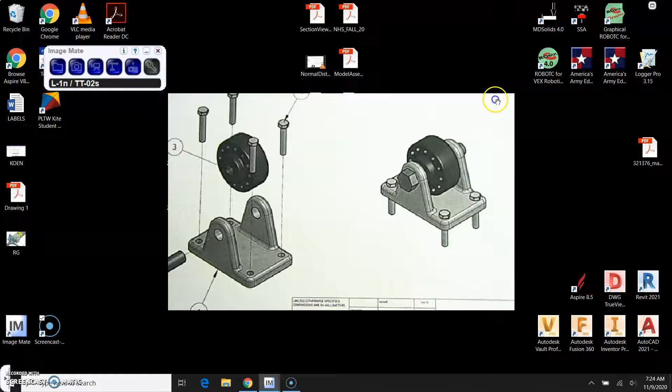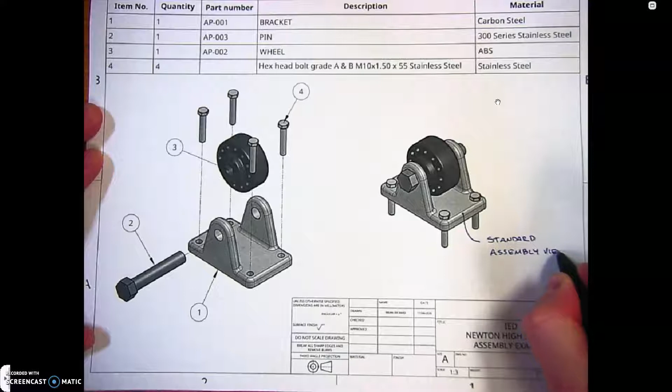Okay, we're going to look at an assembly drawing here, and so we'll take a look at some of the different features and kind of how an assembly drawing works. So right here, first of all, we have what's called a standard assembly view. The standard assembly basically just shows the parts as they would be assembled together.

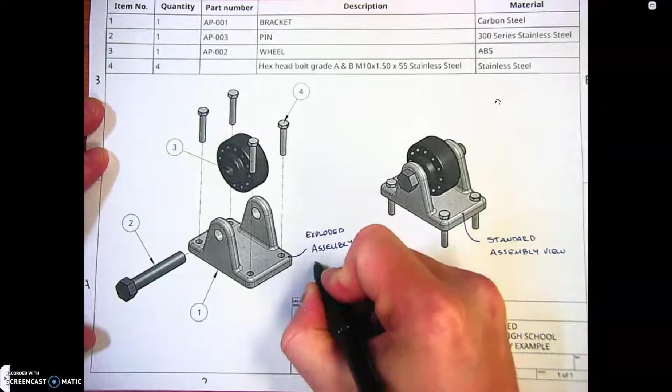Over here we have what's called an exploded assembly view. So the difference between the standard and an exploded assembly view is obviously in the exploded view, the parts are not together, all right? And so the exploded view shows how the parts would go together and gives the person reading the print a clear understanding of that.

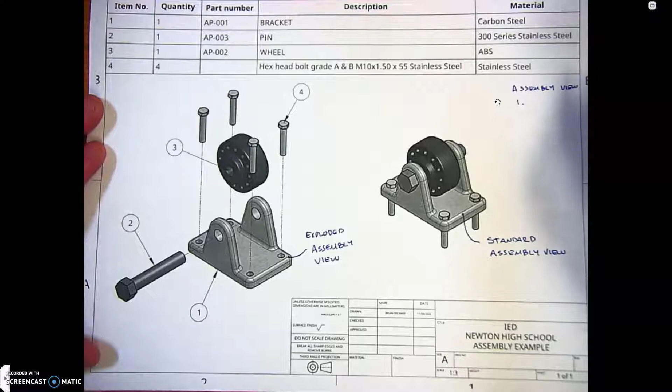A couple of things to point out with both of these views. You can have assembly views be front, right, left, just like you would a traditional multi-view drawing. But the case with these assembly views, if they're isometric, they need to be shaded. So most of the simple assembly views that we're going to be looking at here are these small assemblies with not a ton of parts. Those assemblies are going to need to be shaded.

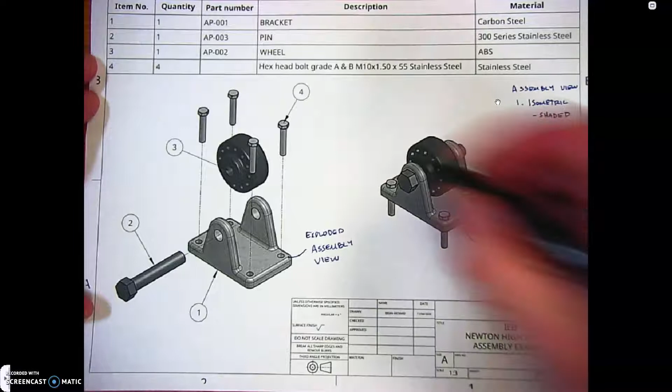These lines right here that are located in the exploded assembly view are called explode lines. Explode lines help you show how the parts are going to go together. And so we should always show them when it helps with understanding.

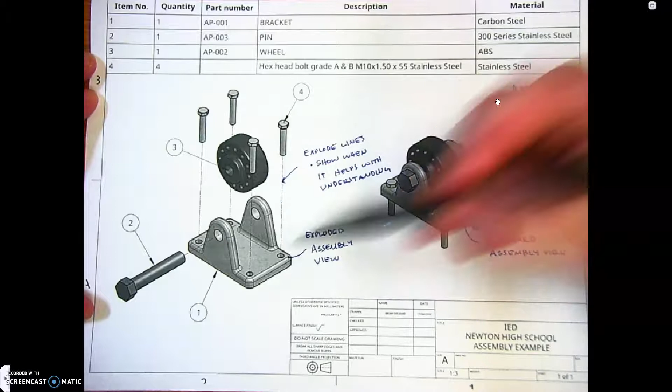So what I mean by that, when it helps with understanding, if you can see that this line goes directly into that hole, it's very clear that this bolt goes into that hole. And so if it's helping you clarify where the parts are supposed to go, you should always show an explode line. This table up here is called a bill of materials. And so I'll just make a line. This is a bill of materials.

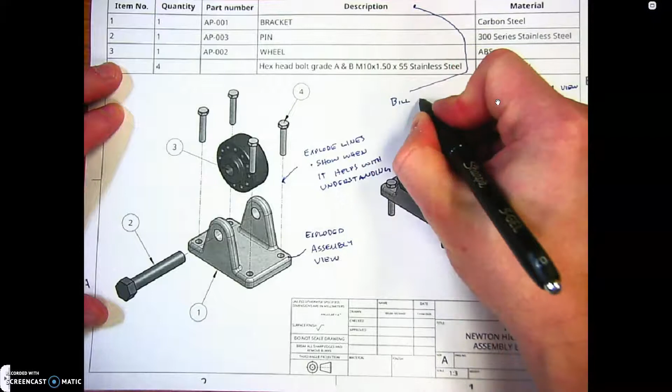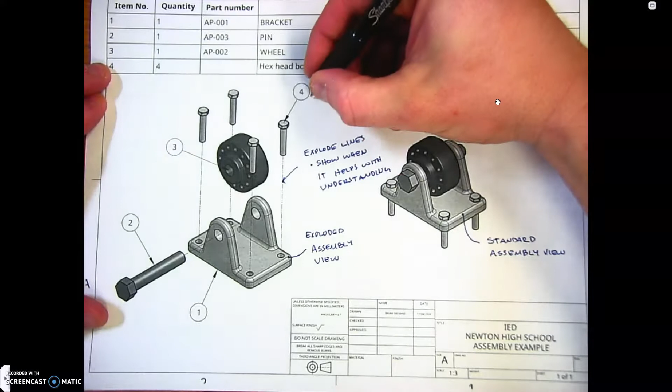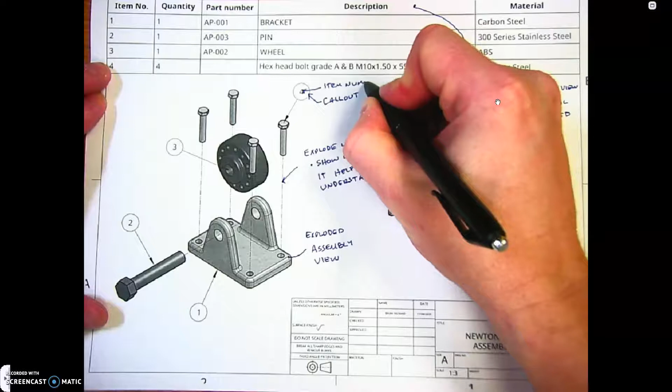So what a bill of materials does is it gives you all of the details that you need in an assembly drawing. And so for instance, on this assembly drawing, we have an item number that corresponds with something on our drawing called a call out. And so this right here, this little ballooned bubble is called a call out. And this number inside of that call out is the item number. All right, so each one of these item numbers corresponds with the numbers on the assembly.

Quantity is the number of times that part comes up in the assembly. And so, for instance, this bracket piece, there's only one of them, but the hex head bolt, there are 4 of them in the assembly. The next item on our bill of materials is a part number, and so I'm going to give you a naming system for that. The first 2 initials of the part number should always be the project you're working on. And so in this case, it's an assembly practice. All right, so that's why it says AP.

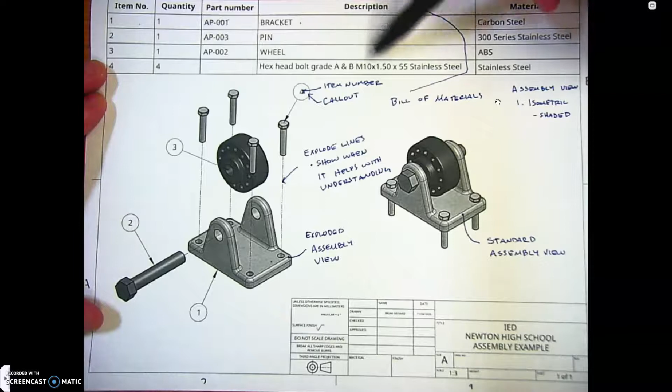And then you have 001. So 1 would be the part number here for the call out for this part, which is the bracket. And so we put 2 zeros in front of it. Some assemblies could have a lot of parts, and so that's a typical way you would see that. Over here we have a description box that gives us the description of every part, and we've also included a material box that gives us the materials.

On different assembly drawings, you could have all kinds of other information within that bill of materials. You could have vendors, you could have the costs of the part, the vendor for where the part's going to be purchased from. There's a whole lot of other information that could be included. All right, but with our standard assembly drawings, these are the 5 or so categories that we'll ask for within your assemblies. And so that's the basic of an assembly drawing.